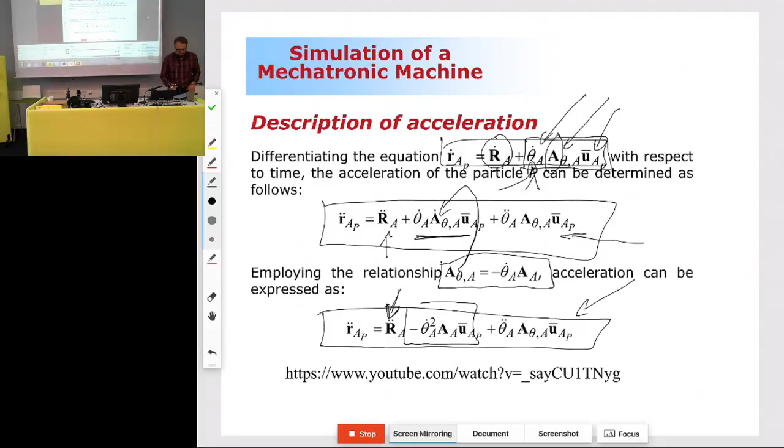Three components. Okay, let's take a look. So what are these components? First, translational acceleration component, normal acceleration component, and then the tangential acceleration component.

I'm sure that you're all familiar with these components. I'm not this time, I'm just using a little bit of different notation. Clear?

I have some good news and bad news. Well, which one would you like to hear first? Bad news. Okay, bad news is quite bad news.

Are you interested to learn a little more about the Coriolis acceleration, the Coriolis effect? There are some good videos available, some of them are listed here. So take a look, they are very educational. It really gives you an idea of what Coriolis acceleration is. It's all about perspective, how is your perspective, where is your reference system where you're measuring something?

To shed a little light on this matter, I don't know how this is going to work out, but I have here a YouTube video that I would like to play.

Don't know if this is, maybe this was a risky business because now everything disappeared. Yeah, this is a risky business. Oh, so we're back. So let's not do that again.

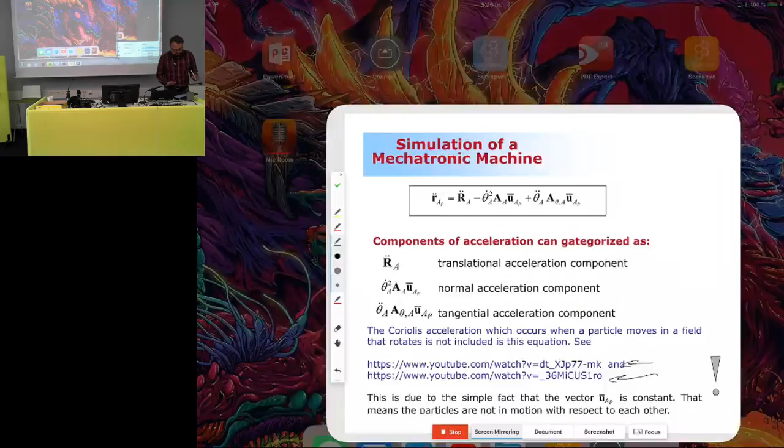So you just go back home and you look at these links. You will recognize an experiment that is related to a merry-go-round. You know what a merry-go-round is? Those are the ones you can find in the play yard, like a wheel that goes around, and you sit in it and spin without limit, and then you feel dizzy. So that's the idea of the merry-go-round. So there is a video where there's a merry-go-round.

4 people are sitting on a merry-go-round, and there's a camera that is off to the side. When one is throwing the ball, it seems to go like here. And when another one is passing the ball, it seems to go like this.

But when you have a camera standing here, when you look at how the path of that object curves, it seems to be curved. It's all about where your reference coordinate system is. This is extremely important in dynamics, from many different perspectives. So take a look at that and think about it, thinking in a way that we're always looking at things from a coordinate system that is not rotating. Our reference coordinate system is standing still.

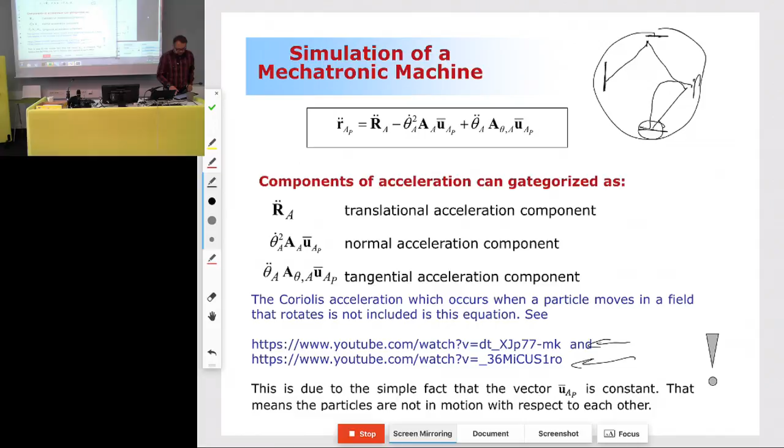Any comments or questions? Is it clear? Quite clear.

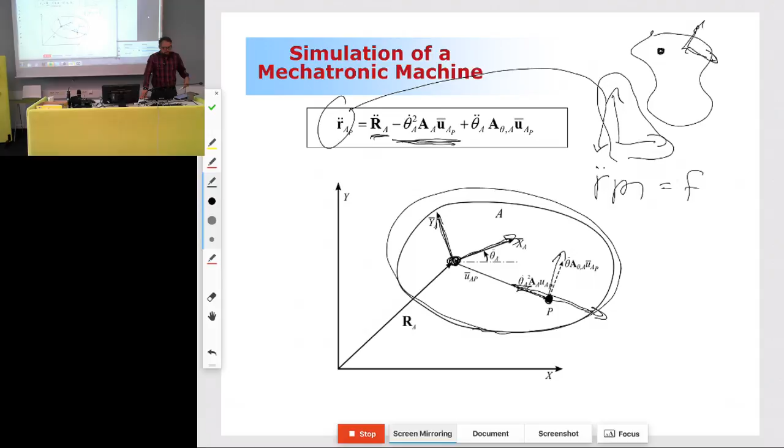Okay, are you ready to move on to something that is very, very important? By the way, there's a competition: if someone is counting correctly how many times I repeat 'very, very important', they can get a special award. I don't know what that is, but that's what I keep repeating. Everything is very, very important, sometimes very, very, very important.

Now we're going to move on to generalized coordinates. Generalized coordinates are the ones we use to solve the responses. We have the definition of a particle at a position, velocity, and acceleration level. Now, looking from the definition of particle, what are the variables, the components that are changing their numerical values? Those are the ones we'll use as variables later to solve the kinematic and dynamic responses. So that's why generalized coordinates are extremely important.

Heads up, there will be an in-class quiz related to generalized coordinates. I will ask you something in the very near future. Clear? So you're awake. Okay, let's get started from this one that we are already familiar with.

So we have this equation that describes the particle position, with respect to the global coordinate system. Here's just one body, and we can extend this to a number of bodies, but let's look at one body first. In this equation, what are the variables? What are the components that can change numerical values when the body is translating and rotating? That's the problem we have to solve. Once we know those variables, we will use them to solve the responses.

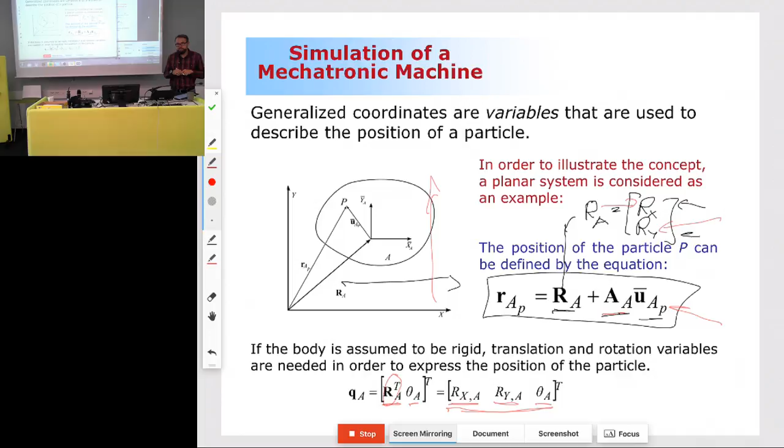Okay, good. So in the three-dimensional case, with generalized coordinates, we have a bit more. We have vector r that consists of 3 components, and then we have vector theta that includes the rotational parameters. We can have 3 or 4 of them, depending on how we're going to define the orientation. If we're using Euler angles, we're going to have 3 of them.

So one spatial body needs 6 generalized coordinates. Clear? Okay, so these are the equations. A planar system consisting of n bodies needs 3 multiplied by n variables that are generalized coordinates to describe its configuration. Those are the ones we're going to later solve to find the system responses. Make sense?

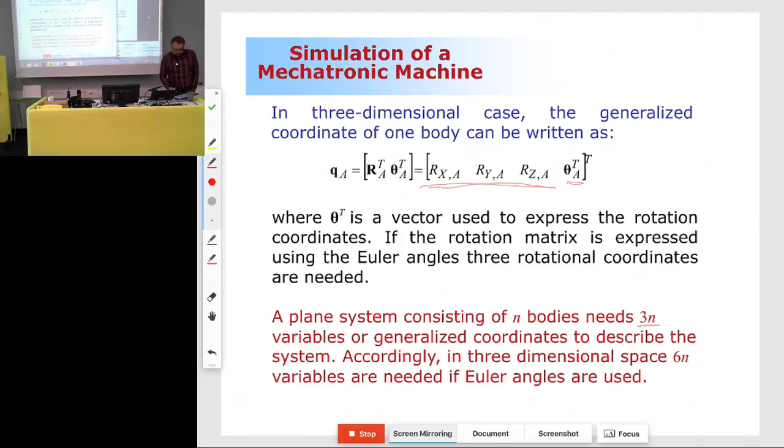Kind of. Okay, all right. In three-dimensional space it's 6 multiplied by n.

And my question is this: for body A, the generalized coordinates are, and now we're speaking about 2-dimensional space, the choices are rx, ry, theta; u bar x, u bar y, rx, ry, theta; u bar x, u bar y, theta. Only one is correct.

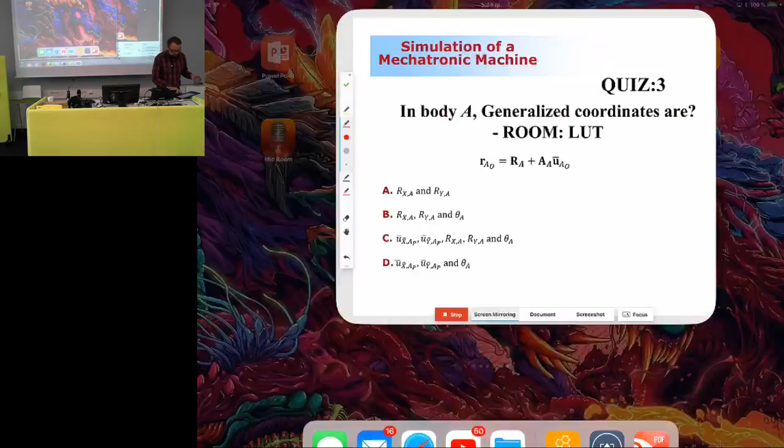How is the streaming, by the way? Are you watching on YouTube? Is it looking all right on YouTube? Yeah, okay, good.

Two-dimensional case. We're speaking about the two-dimensional case. What are the variables to describe the body configuration completely?

Think about this. This in-class quiz will affect your final grade. How you're answering today will affect your final grade. Final grade will affect your life. So, no pressure.

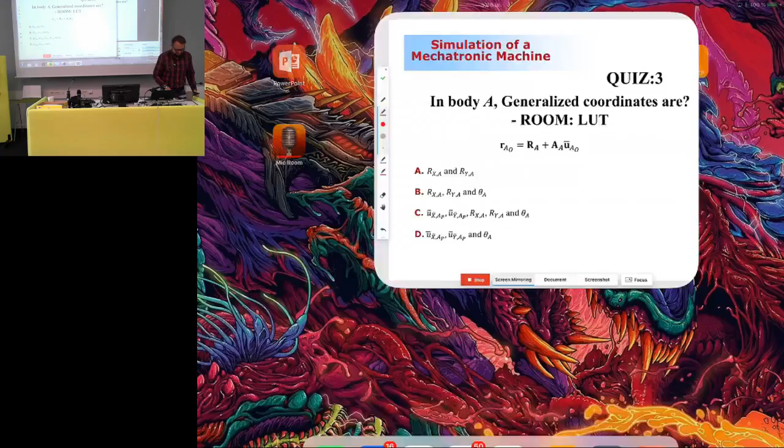Ready? Okay. So it's the moment of truth. I'm going to click this one here, then we will see. You ready? Yeah, 75, yeah, so nice. All right, I need to bring a coffee coupon to you guys. Nice, good scoring, good scoring.

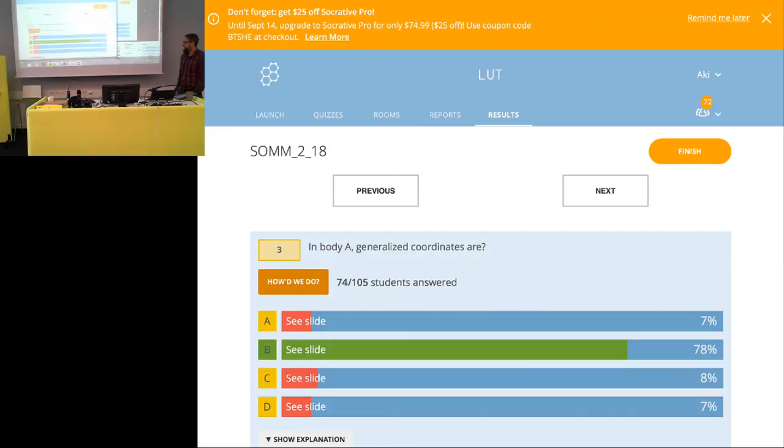But if we go back here, now I am closer, this is 78. 78, 78. So what could these be? My guess was 82. And these guys, what did they say? 75, okay, so it goes to you then. I am closer, thank you. So it's you then, my mistake. It's complicated math and I don't have a computer with me. So I do, but I'm not using it in a proper way.

Okay, so let's look at the options here. The first option makes no sense because it only describes translation, so we're missing critical information about rotation. The third option makes no sense because vector u bar is constant, and we're looking for variables, so that's no good. This is absolutely no good, the worst option ever, because what we have is two constant values and then the angle theta, which makes no sense. So this is the correct one, this is the one that makes sense.

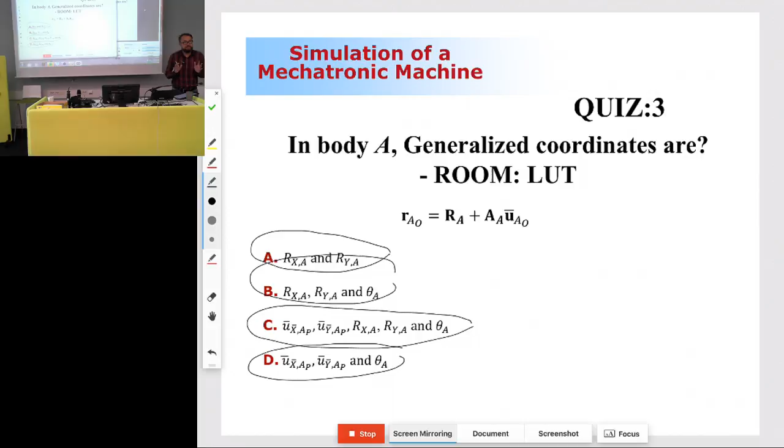Okay, now we will move on to something we need when carrying out the kinematic analysis: constraint equations. So now you know how a single body works, how to describe particles at position, velocity, and acceleration level. But as you learned from my first lecture, a single body is not a multi-body system. So we need multiple bodies, like the title multi-body dynamics implies, and those multiple bodies have to be combined with constraints, joints.

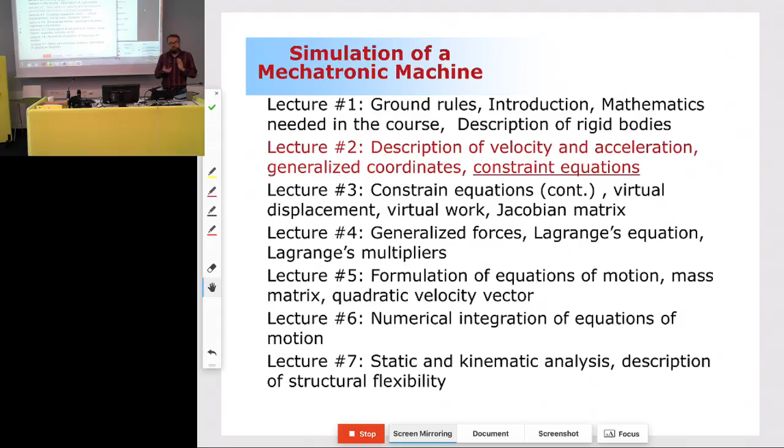And now what we're going to do next is look at how we can describe these mechanical joints and how we can do that mathematically. Mathematically they are called constraints, and the constraints limit the motion possibilities. That's what we're going to do. So here's a concept that is important for you to understand. This is what I explained to you already.

Because of the constraints, their bodies are no longer free to move as they want, but instead they have to follow a certain pattern. This certain way comes through the constraints, and every single system will have a certain number of ways to move, which will later be called the number of degrees of freedom.

Already, for your information, the crankshaft mechanism shown here has 1 degree of freedom, meaning the system can move one way only. For example, if I take hold of the piston body and force it to move left, the other bodies - the connection rod and crankshaft - have to follow a certain way. There's only one way they have to follow, no alternatives. That's where the number of degrees of freedom comes from.

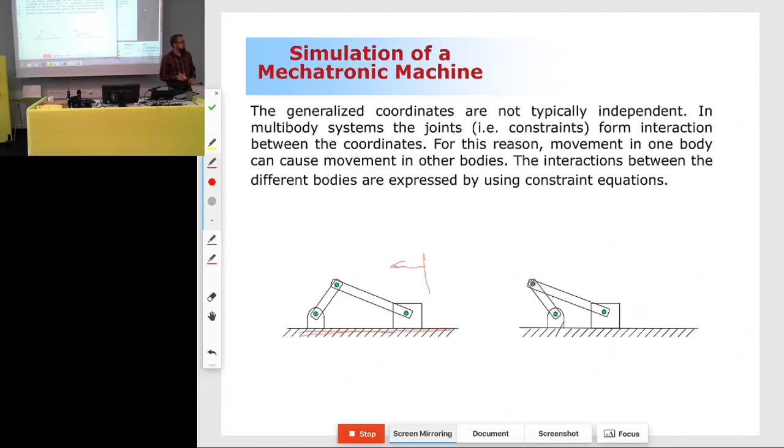Now what we're looking at next is the mathematical definitions for how we limit the motion possibilities. That's our goal for the rest of the day. We don't have that much time - I know you guys are busy and need to be off soon, but we still have time to explain this, and I have an example that clarifies the whole deal. Before stepping into this example, let's look at the big picture.

So we have the vector of generalized coordinates. You know what they are - those are the coordinates that define the system configuration, each one of the bodies in the system. Those coordinates are defined mathematically as shown here, a vector q. I have here a certain number of generalized coordinates. For example, if I have 2 planar bodies, the vector q consists of how many components?

6 components. Okay, then I have a number of constraints, and I'm putting those in a vector, a function of generalized coordinates and possibly time, depending on what kind of constraints we're dealing with. If you look inside this vector, I have constraint equations that are independent constraints, functions of generalized coordinates. That's the concept of constraints. Clear?

No, I don't trust you. If you understood the concept of constraint equation based on this alone, it's not physically possible. So I need to explain an example, and based on the example, maybe slowly you can get an idea. This is a big concept that tells you nothing about how you can use the constraints. We will get back to this a little later.

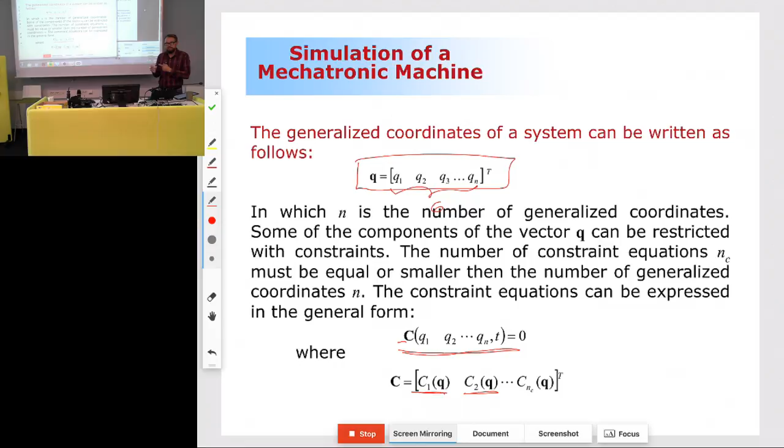I want to constrain these bodies together such that there is a revolute joint located at point O, a point common for these 2 bodies. That's where I'm going to place the revolute joint. How can I do that mathematically?

I can do that mathematically by going back to the equation I'm very familiar with. I'll use this equation you know back and forth, and define this point O using this equation with respect to body A, and do the same with respect to body B. Once I put those equal, it means these points have to be common no matter what, because the constraint forces that point to be common. That's the trick I'm using to introduce a revolute joint.

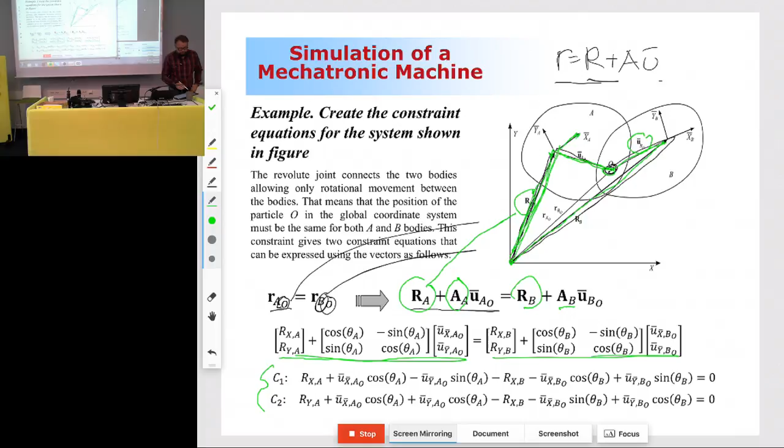Another concept I would like to explain today is the number of degrees of freedom. The number of degrees of freedom depends on the number of generalized coordinates and the number of independent constraints. You already know the generalized coordinates depend on the number of bodies. The number of constraint equations depends on how many constraints you have, which depends on the different joints in your system.

Let's look at the example we were dealing with previously, where there was body A and body B combined together via a revolute joint. So two bodies - how many generalized coordinates do I need to describe the system? 6. What are the number of constraints because of the revolute joint? You learned that from the previous slide - how many constraint equations you need? 2. So the number of degrees of freedom is 4. Simple like this - that's how you calculate the number of different ways the system can move.

Then there's a special case where it's possible that the number of degrees of freedom is equal to 0. And then we're speaking about a kinematically driven system. But that's something we will get back to next week.

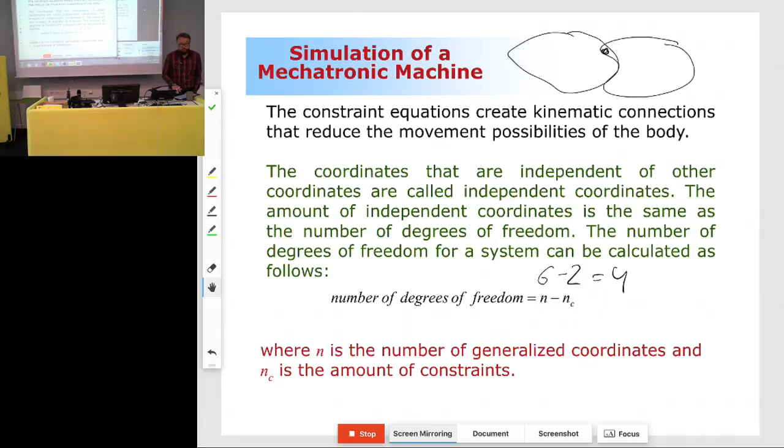Okay, no, actually there is - shortly, because I did not remember that the next slide is about kinematically driven and dynamically driven systems. So let me explain this concept to you, and then soon we're going to close for today.

So I have here this crankshaft mechanism, and we concluded that it consists of 1 degree of freedom, but we did not count it. So let's count it. In a crankshaft mechanism, I have 1, 2, 3 moving bodies. So how many generalized coordinates do I need to describe it? 9, so it's going to be 9.

Then I have here revolute joints - 1, 2, 3 revolute joints. Each one needs 2 constraint equations, so I have 6 constraints because of the revolute joints. And then I have 1 translational joint - you don't really know how many constraints are needed, but I'll tell you: 2 are needed to describe translational constraints. So 6 plus 2, that's 8. So the number of degrees of freedom is 1.

Now what I do in this scenario, called a kinematically driven mechanism, is eliminate the last remaining degree of freedom. The way I eliminate that is by introducing an additional constraint, called a driving constraint. I'm saying that the crankshaft has to follow the angle that is prescribed here - no matter what you're doing, you have to follow this prescribed path, which is mathematically shown as angle theta having to equal something. That is a constraint, because it has to obey that.